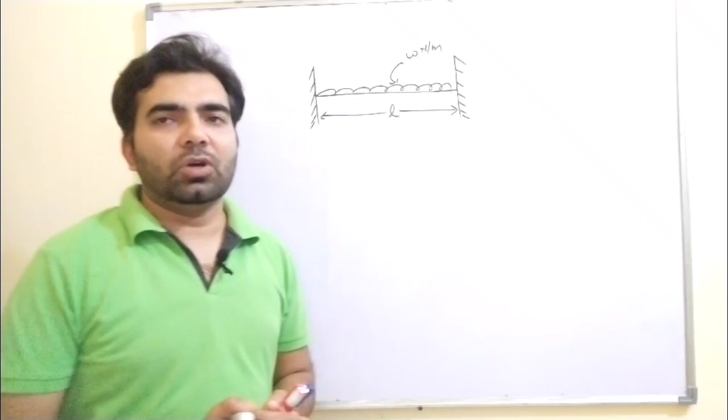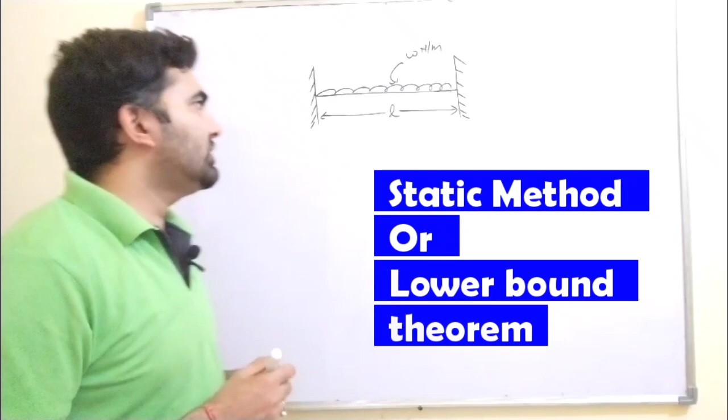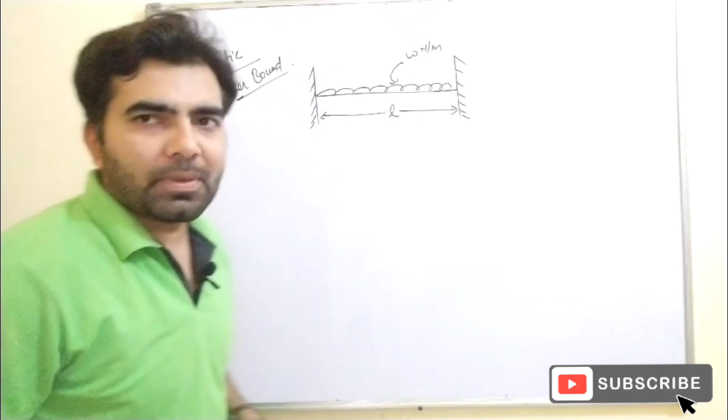Which is also called lower bound theorem. So in this method we should know the minimum number of plastic hinges required for complete collapse of the structure.

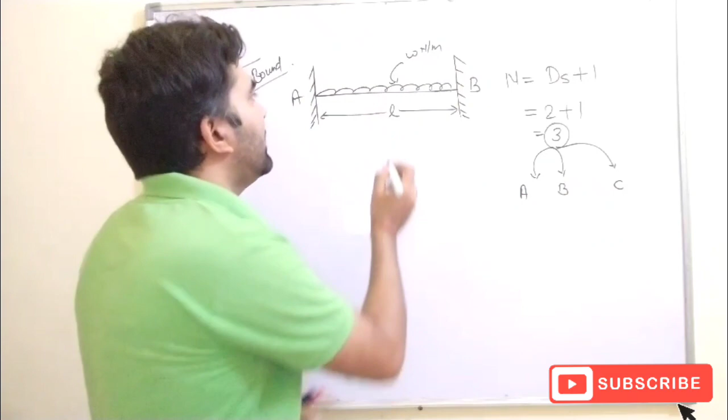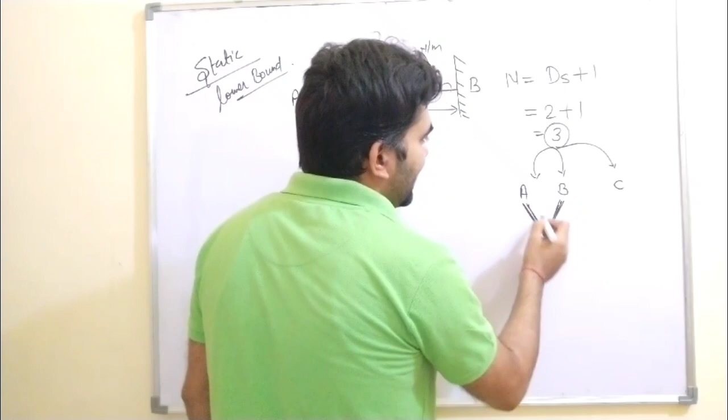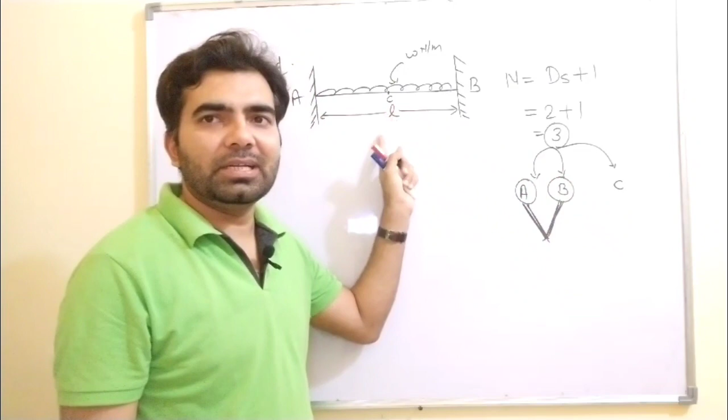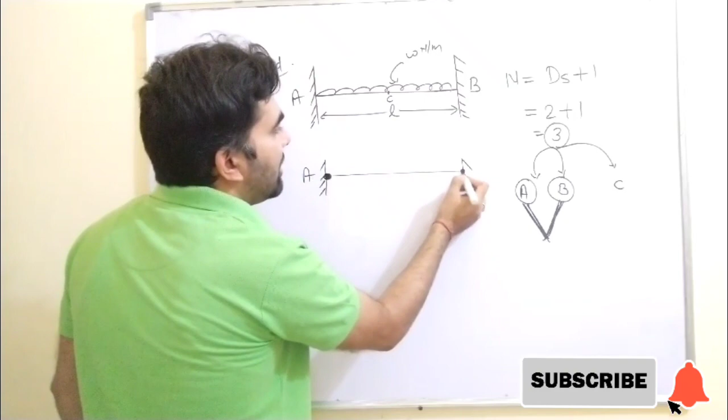The first two plastic hinges develop simultaneously at point A and point B, and the third plastic hinge develops at point C where the maximum bending moment is occurring. So if plastic hinges develop at points A and B, then this beam behaves like a simply supported beam.

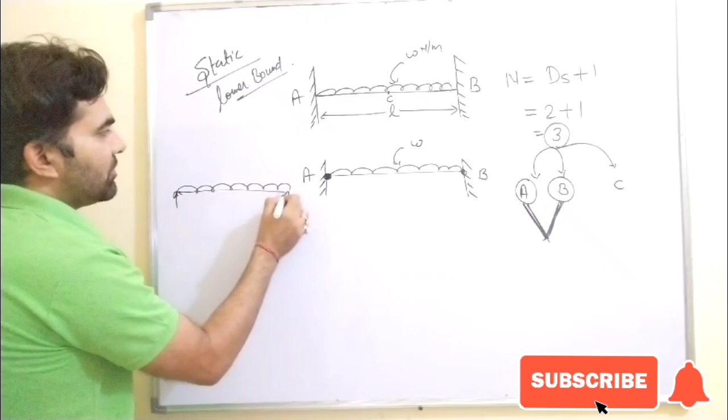And if the beam is simply supported and subjected to UDL, then this is the bending moment diagram, and the value is WL²/8, the maximum bending moment at the center. So this is the bending moment diagram considering a simply supported beam.

Due to plastic hinges developed at points A and B, the plastic moment will come, and the direction of plastic moment is like this, because this is the resisting moment, so the direction is opposite. If the beam deflects like this, then the moment will act like this.

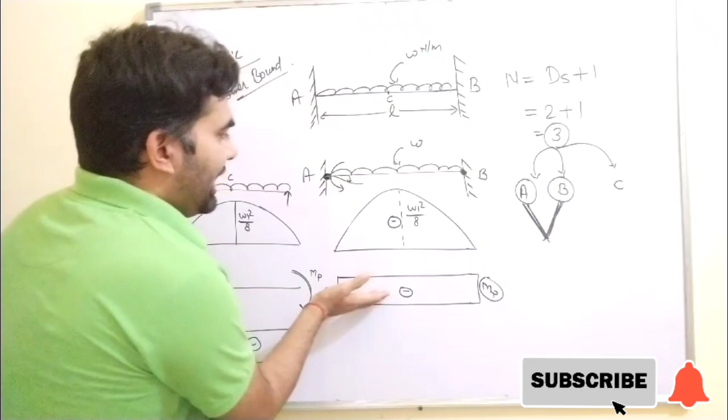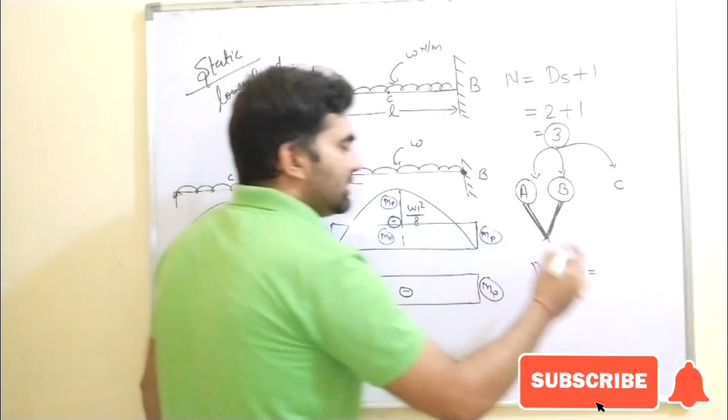The first two plastic hinges develop simultaneously at A and B, and the third plastic hinge develops at point C. So this is MP, and this is also MP. So MP plus MP is equal to this ordinate, WL²/8. Then 2MP is equal to WL²/8.

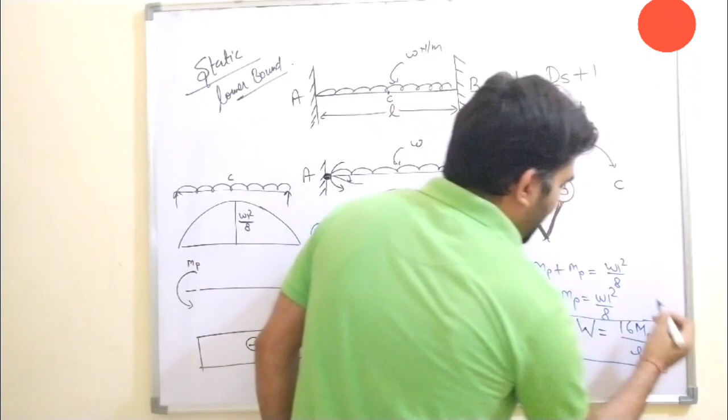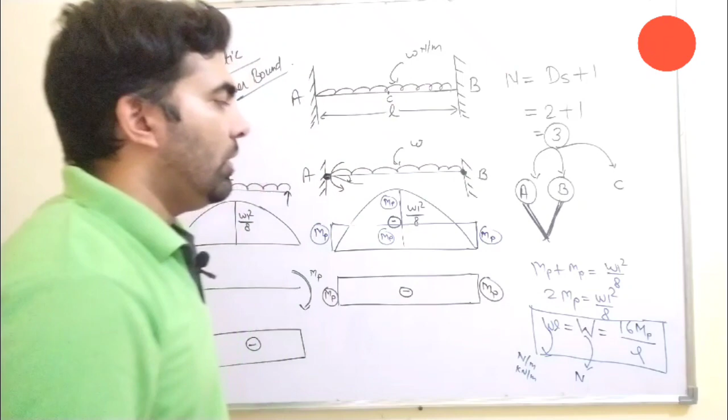Then wL, which is equal to capital W, equals 16MP/L. This is the collapse load. In this case load is in newton or kilonewton, and in this case load is newton per meter, kilonewton per meter, etc. So for a fixed beam carrying UDL throughout the span, the true collapse load is 16MP/L.

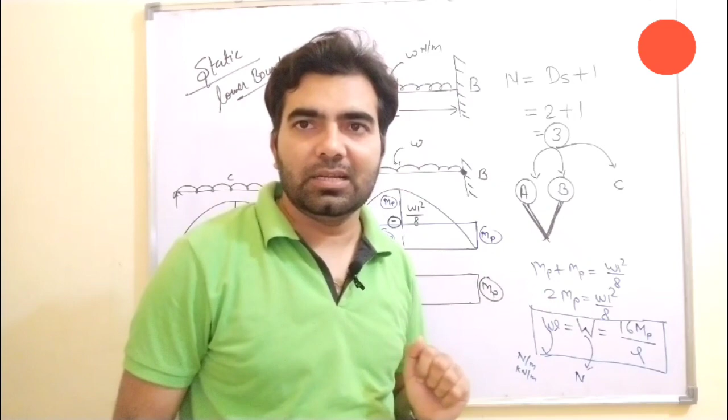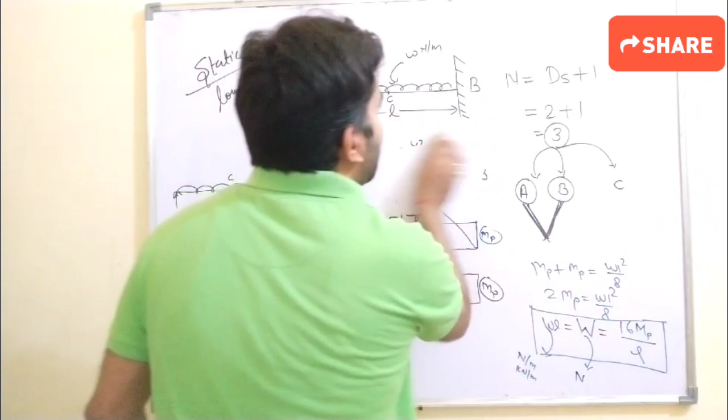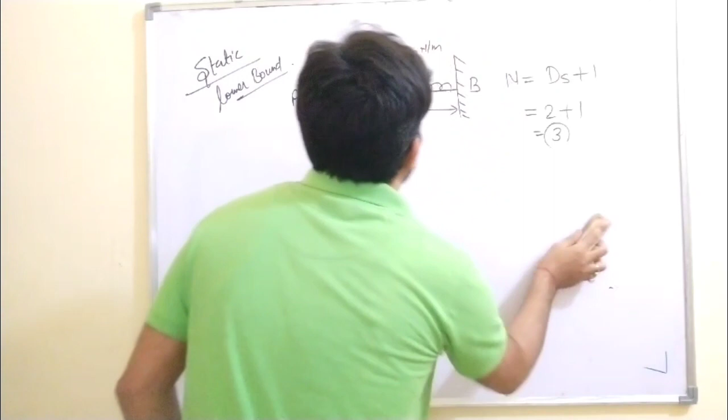The number of plastic hinges is the same, 3. Kinematic method is also called upper bound theorem, and in upper bound theorem we draw a mechanism.

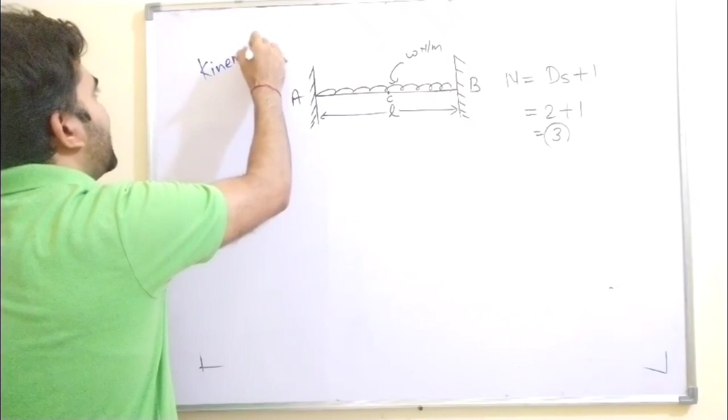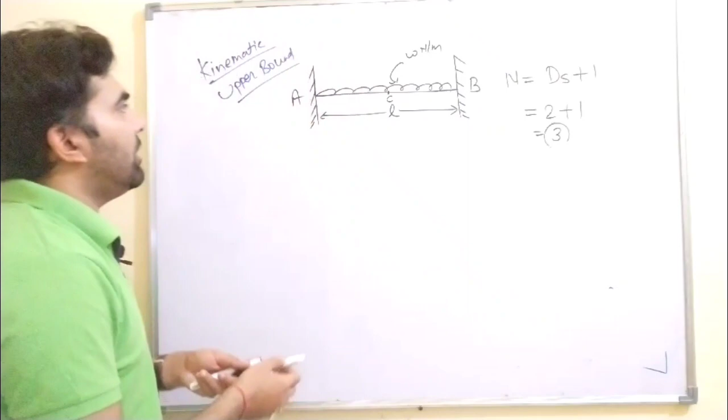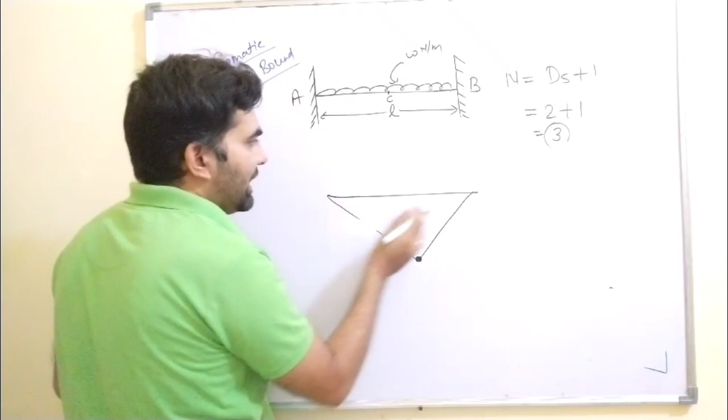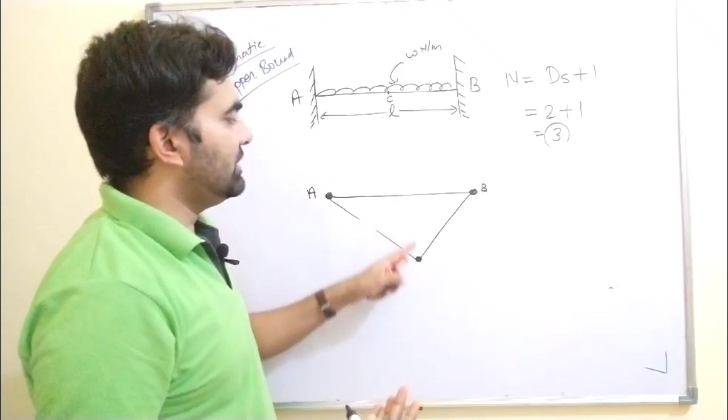A mechanism will form because plastic hinges develop. Plastic hinges develop at points A and B simultaneously, and with further loading the plastic hinge will develop at point C. Due to this mechanism this angle is theta, this angle is also theta, this is theta, this is theta.

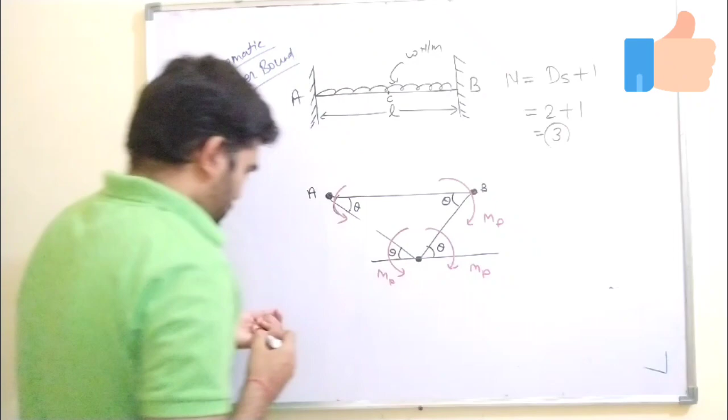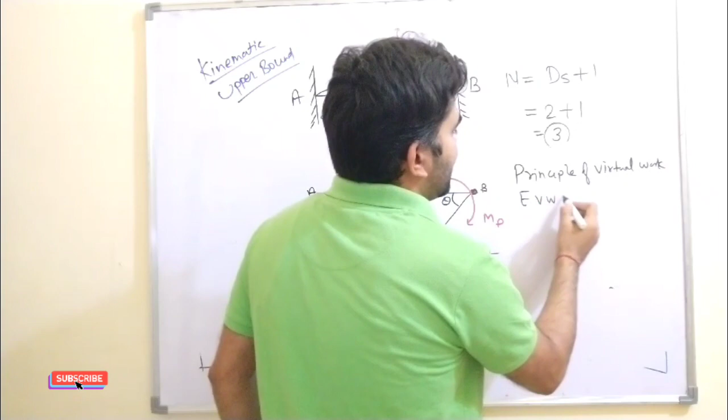The plastic moment is in the opposite direction. So this is MP, this is MP, and this is MP, and this is MP. Using the principle of virtual work, external work done is equal to internal work done.

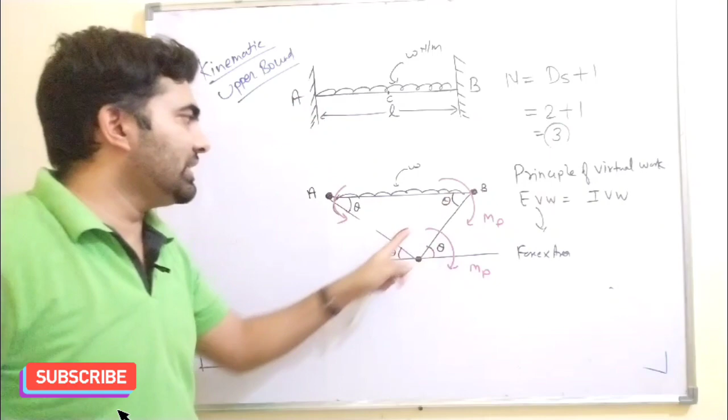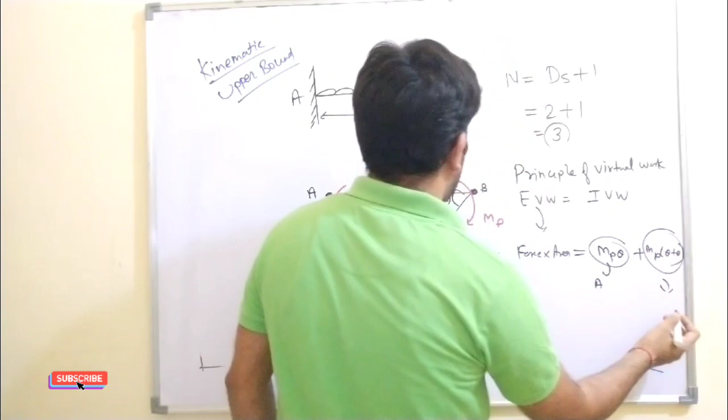In this case external work done is equal to force into area. If the beam is subjected to UDL, then we consider the area, and internal work done is equal to MP theta at point A plus MP into theta plus theta at point C, plus MP theta at point B.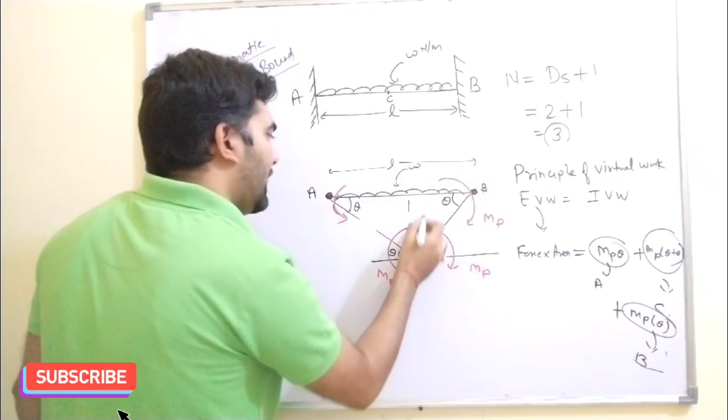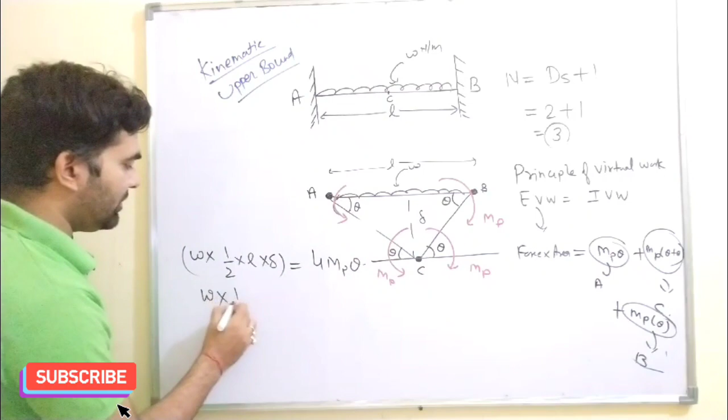So force is w into area. Area of this triangle is half into base into height; the height is delta. Internal work is 2 plus 1 plus 1, 4MP theta. So w into 1/2 into L into delta.

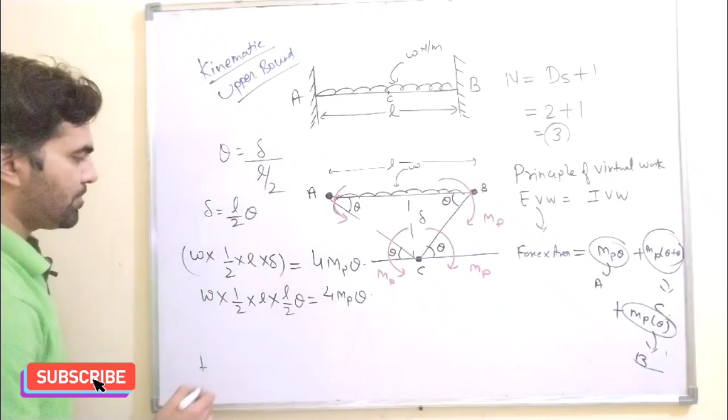Angle is equal to arc upon radius; this radius is half of the length. So delta is equal to L/2 into theta. So this gives L/2 into theta equal to 4MP theta. Theta cancels, so wL, capital W, is equal to 16MP/L. This is the true collapse load by using kinematic method.